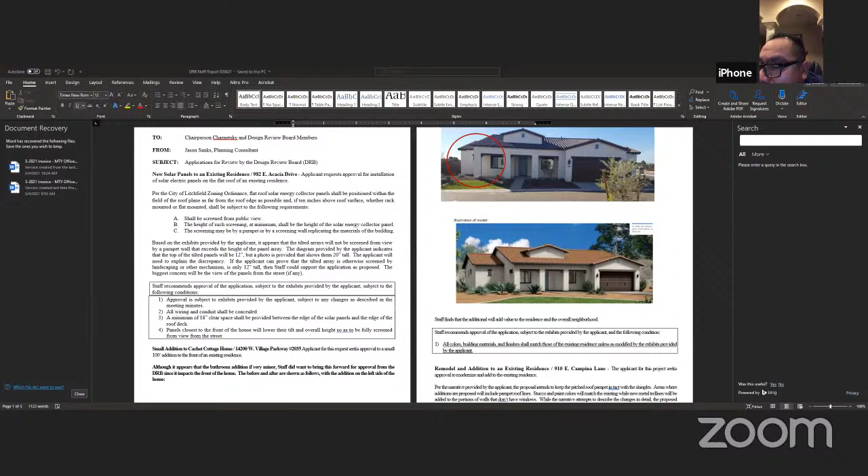Okay, well, do any of the board members have any questions for staff or the applicant? Let me get out of my screen here. Let's see. Okay, there we go.

I drove by that area. It's more when you see the pictures of the elevations - they look like standalone things. These are very tight together, zero lot line sort of houses.

I don't know if there's a Google Earth picture of it. Probably not because it's recently built. The problem is if it's gated, I can't get Google Earth. By the way, the gates are open until they sell out, so during the day anybody can go in. Just so everybody knows, whenever I'm able to provide a Google Street View, I will, but sometimes I can't get it because if the gates are shut when the car runs by, I can't get it.

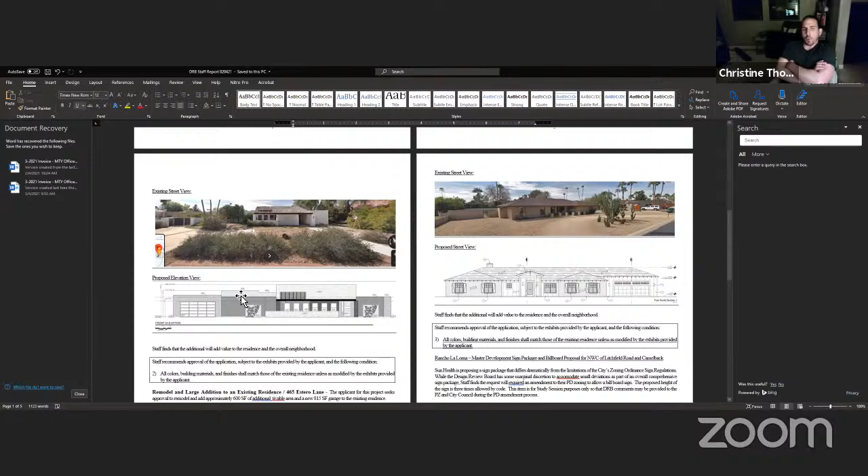All right, are the trees staying or are you taking them out? I believe there is only one tree left there now, we haven't done anything with it. Those 3 palm trees are going to stay though, for sure. And I think there's like one orange tree in front here - I'm sorry, I cut the existing garage off. Okay, all right.

Thanks for clarifying that, I couldn't see it from the street view. Okay, yeah, it's difficult with the landscaping to see that. This will be a good remodel for this street.

Any other questions from the board members? Muted again? No, from the board member to staff or the applicant?

Would anyone like to propose a motion? There's no discussion.

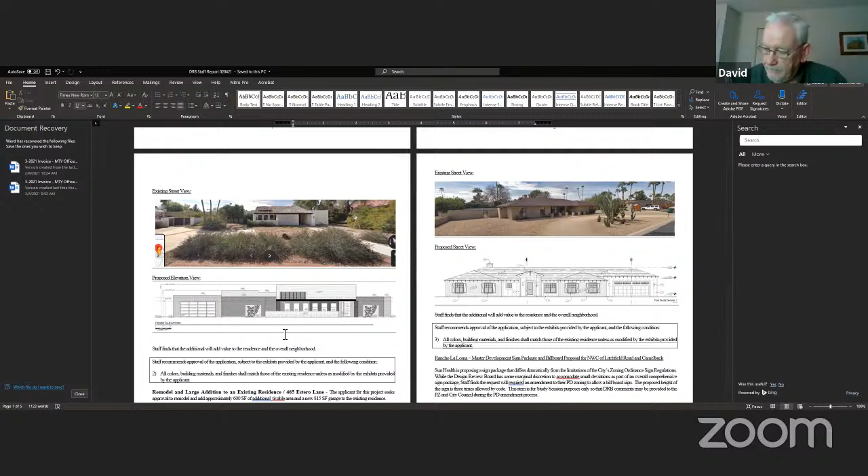I'll propose that we approve the package as submitted for 910 East Campina Lane. Have a second? Sure, Ron. Okay, thank you. We have a motion and a second to approve this as submitted. Any discussion? Hearing none, all in favor say aye. Aye. Aye. Any opposed? Okay, good.

I think this will be really nice for this neighborhood. Thanks. Thank you very much.

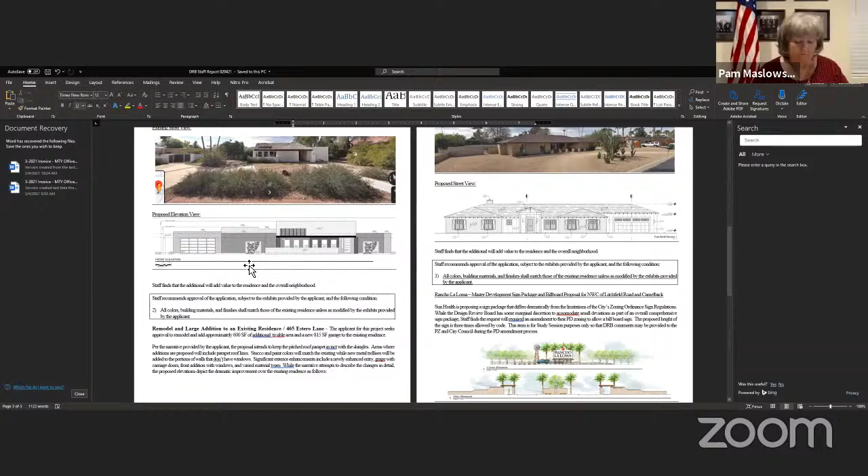Okay, now back to... my mouse is going really slow. Okay, next item. Okay.

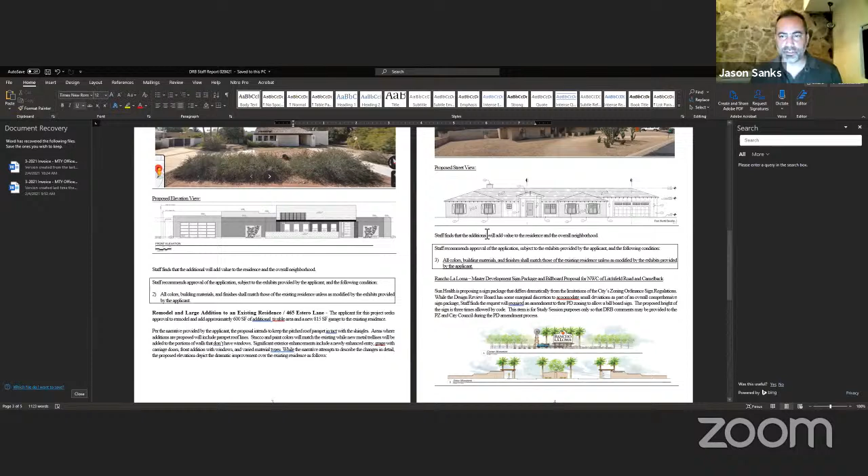Design plans for an addition and exterior remodel for 465 East Estero. Jason, you're up. Kind of keeping in the same vein as the prior application, we have an existing residence at 465 East Estero. The applicant is seeking approval to remodel and add about 600 square feet of additional livable area, and a new 815 square foot garage to the existing residence, about a 4-car garage. Based on the narrative provided, the proposal intends to keep the pitched roof parapet intact with the shingles.

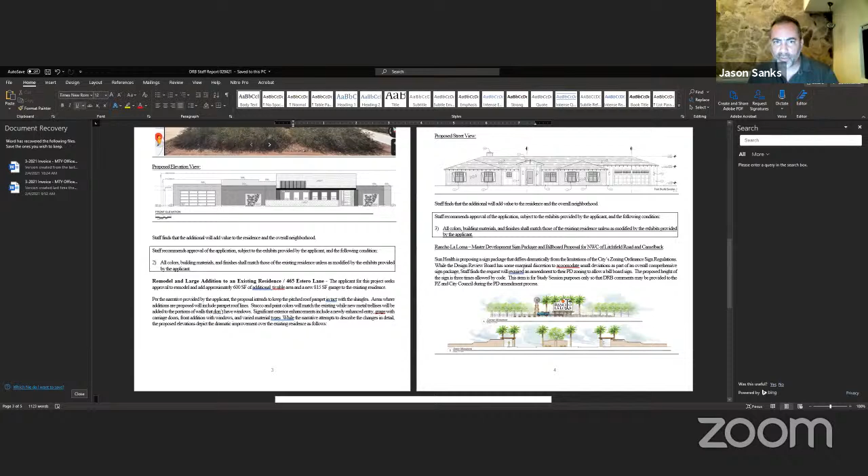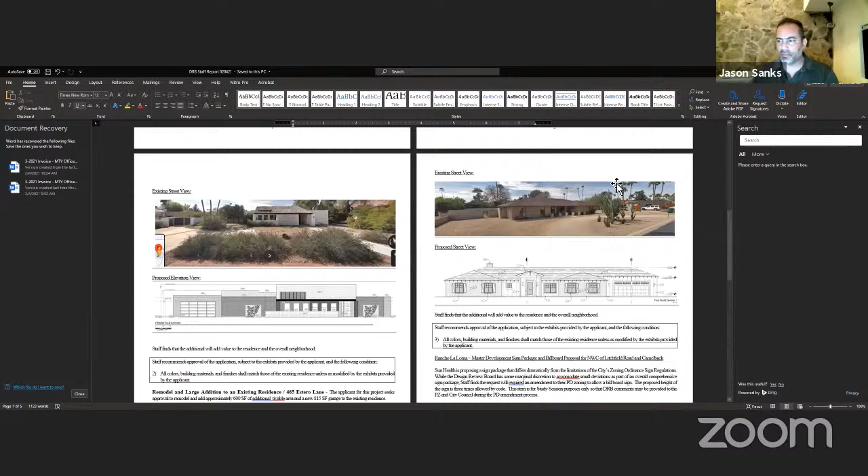Oh, I'm sorry, hold on a second. Let me make sure I'm reading the right one here. And so you can see the difference here from the street view. Obviously these are different residences, so please focus on the page on the right. Maybe if I zoom in I can lose the other one. Give me a second, this might help.

So you can see the existing residence here, kept in good condition—clearly slump block, with pitched roof elements. But the proposal to remodel it is quite different. I guess you could call it making it more contemporary. There's a lot going on with the fenestration—you can see shutters being added, rafter tails. The roof line is more or less the same, but they're adding a lot of adornment to the entry. What we've seen in the past is these low-slung entries, like what's here. They're bringing the prominence of an entry tower to bring focus to the front door.

You're going to see a difference in materials here, and again more adornment to the windows. Just a lot of changes, and then you'll have the carriage doors added over here to the addition on the right hand side for the garage. So there's a lot going on here.

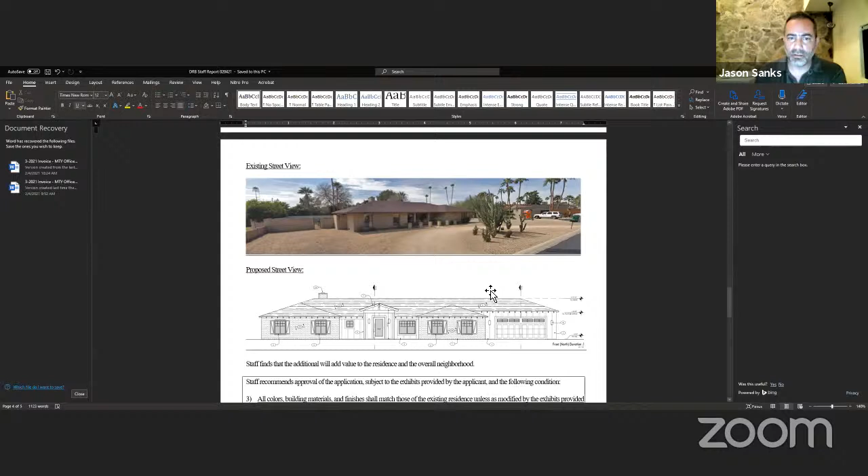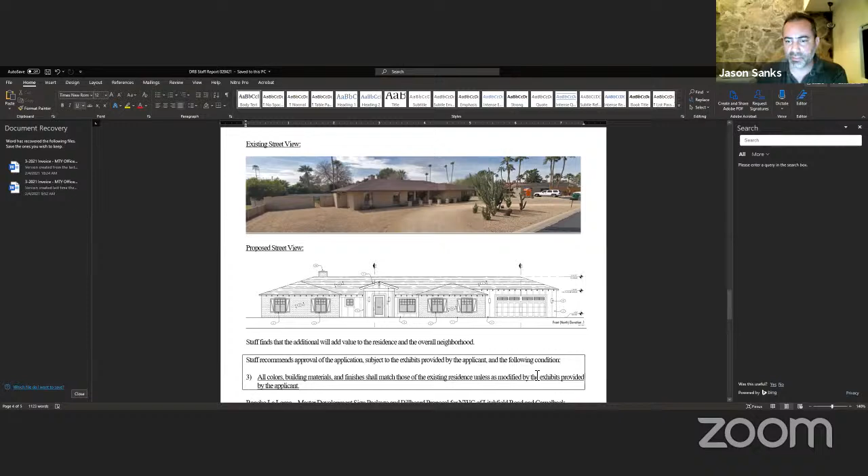It's a large lot. Staff finds that this will be another great addition, updating what's already a nice home into an even nicer home, consistent with some of the relatively upscale remodels we've seen in Litchfield Park as the park continues to improve. So we are recommending approval as the project is likely to add value to the residence and the overall neighborhood. All colors, building materials, and finishes shall match those of the existing residence unless modified by the exhibits provided by the applicant. With that, I'd be happy to answer any questions.

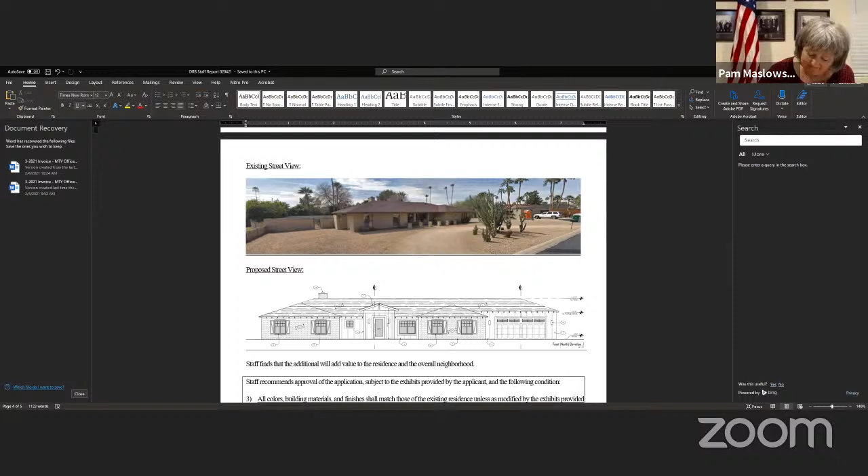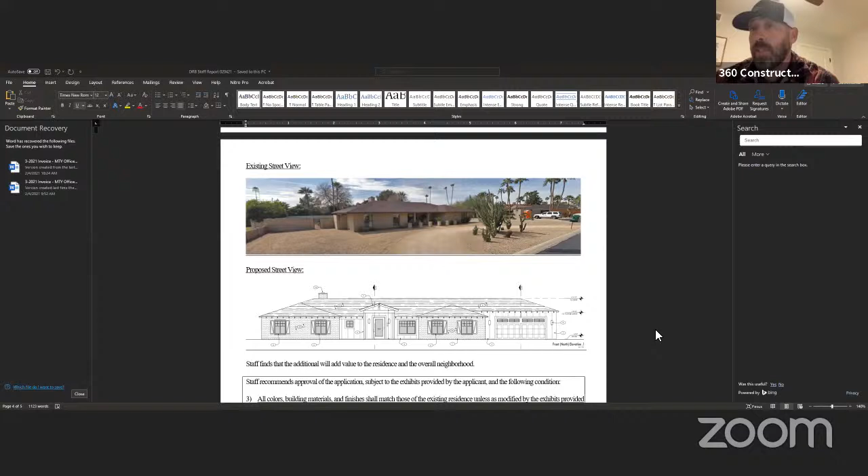Is the applicant present or his agent? Yeah, this is Mike with 360 Construction. Okay, right, he's back. We saw this before, didn't we? Yeah, there's just been some slight modifications to the plan, and it actually simplifies the plan and takes away the one thing I believe the board had a problem with, which was the RV garage—that's been deleted with these new changes.

Okay, it looks good, looks really good. Any questions or concerns from the board members? So I think that if I could say something—my son may be joining me.

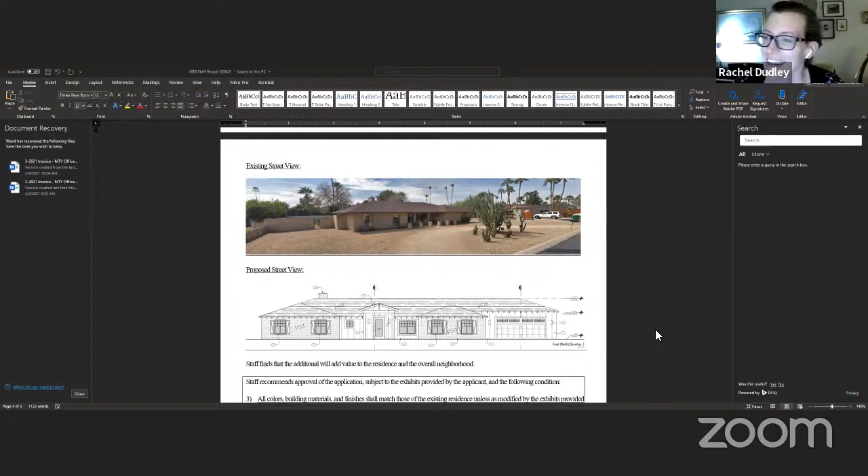I love this, I think it looks beautiful. But I would like to make a comment generally that with that desert landscape style, the color of white seems a little cool in tone to me. You might consider going with something a little more warm of a white. It obviously doesn't change my feelings about this package, just a comment for consideration.

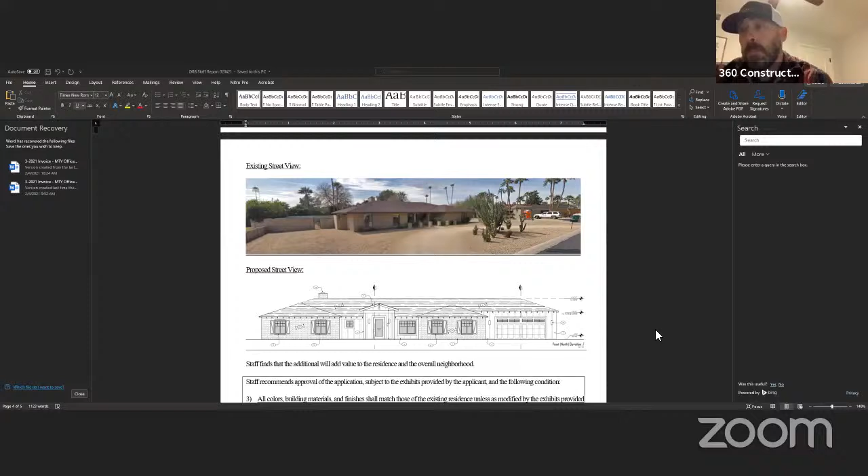With a remodel this size, there will be some landscape upgrades following construction of the house, and I'm sure some more greenery, getting rid of some of the desert landscape and rock. Yeah, I think it's a nice package.

If it's okay, I'd like to make a motion that we approve this as presented for 465 East Estero. Okay, thank you, do you have a second? I'll second. A motion and a second. Any further discussion? Okay, all in favor say aye. Aye. Aye. Any opposed? None. Okay, passes. Thank you, thank you.

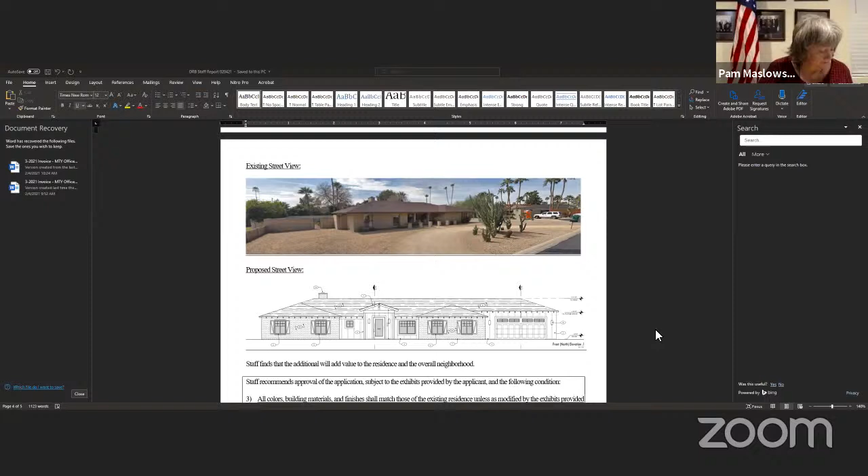All right, and I think we have one more thing. The next item up is signage proposed for Sun Health La Loma campus located at the northwest corner of Litchfield and Camelback Roads.

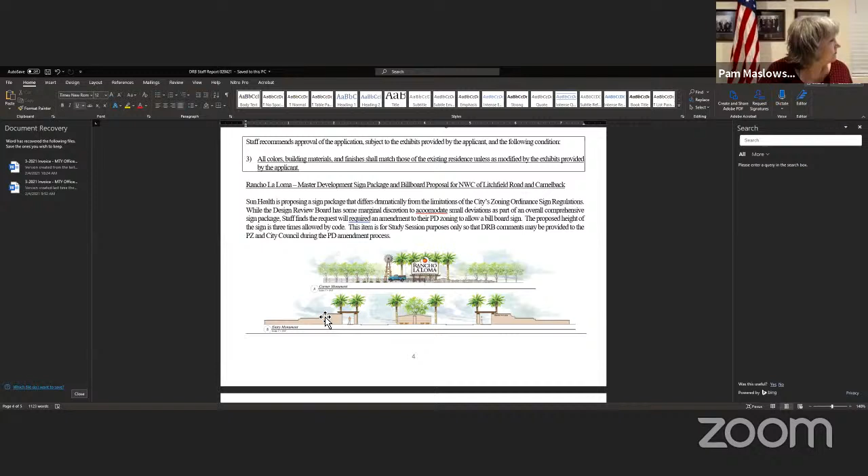Jason, can you tell us about this one? Certainly, thank you board members. We also have Paul Vanderveen available, he's through telephone, here to discuss things. But let's do the backstory first and then talk details afterwards.

As you know, Rancho La Loma, AKA Sun Health Development, is the master plan community that includes the Continuum of Care campus, which is the approved use across the entire property for the most part, except for agritourism.

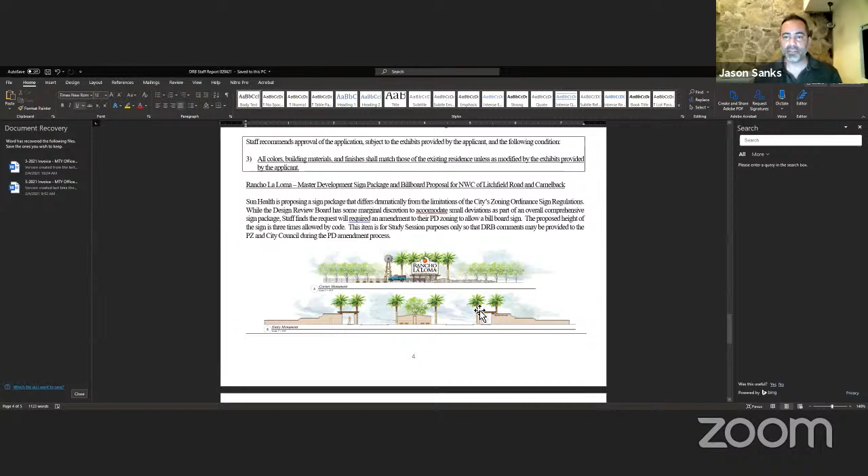I've gone ahead and shown you this, kind of the landscape version. The below portion is the other entry, further west, which is a lot more muted and typical of what you're seeing at Sun Health. This is the blow-up showing the gooseneck downlit looking lights that will illuminate it. On the ground, you can't quite see it, but there's intended to be some uplighting so the sign really glows with an even amount of light.

They'd like to do split rail fencing. This is all kind of somehow managing to tie this agritourism concept that is as yet undeveloped with the whole Sun Health campus, which is a conglomeration of basic contemporary Southwest architecture and a little bit of the new stuff like you saw in the community center. It's all kind of an amalgam together.

So what they're hoping for is to get your blessing and send it up the chain so that council, I believe, will ultimately be the one that has to make the decision on this, and they can construct it. Now, of course, Paul would love to do this within like a couple months. I'll let him speak in a moment.

But if you look down here, here's the site plan. This is the area where, see this stuff down below? This is the kind of area here where it's the more muted stuff. This is the billboard. This is Litchfield Road. This is Camelback. And here's Fry's and Starbucks. And this is 25 feet tall.

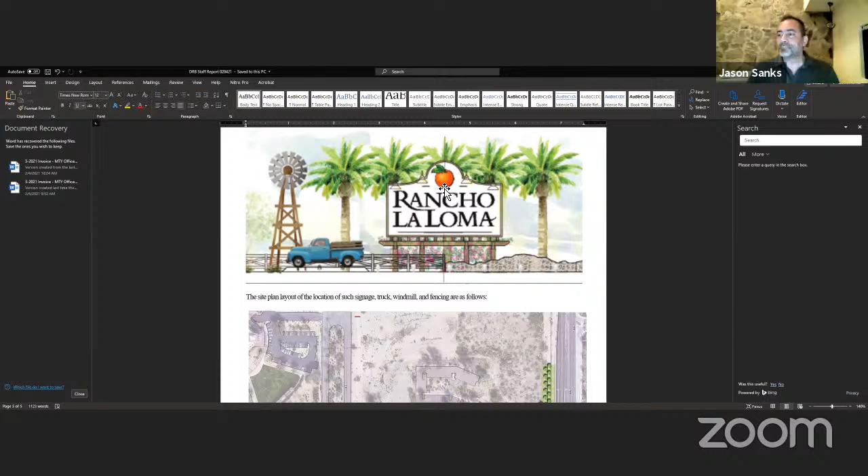Do you have anything to add, Paul? Yes, Chair. This is just for clarification. Paul Vanderveen with Sun Health. Our corporate address is 14719 West Grand Avenue.

I think Jason did a good job. I think he's being a very good city person to state the case. I'll put a little bit of passion in that we do feel this is a statement for 322 acres, which would include the hilltop portion. We're not trying to say this is Sun Health, or that it's one of the pieces of many things that will happen on this property, but we did want to harken back to the history and tie things in.

So the truck that's representative, and I think there's an exhibit in the package - I'm sorry, I'm on my cell phone tonight, so I apologize for my format - but the truck actually was part of the Hilltop at one time. It is an old farm truck, a 1957 Chevy. It sits on our property, abandoned, and looks a little beat up right now. The city manager and I were going back and forth on who actually owned it, because we didn't know for sure if it transferred when the city took it over, but we found out it's ours.

And so we actually think that's a historic element. It'll be painted the Sun Health blue, and on the door it'll say Sun Health. So really the idea is that we're promoting Rancho La Loma, the historic property. The development would be like any development you'd see maybe Pulte do, where it's something, and then 'by Pulte' - the door on the truck would be 'by Pulte.' The truck would be affixed to the ground and done.

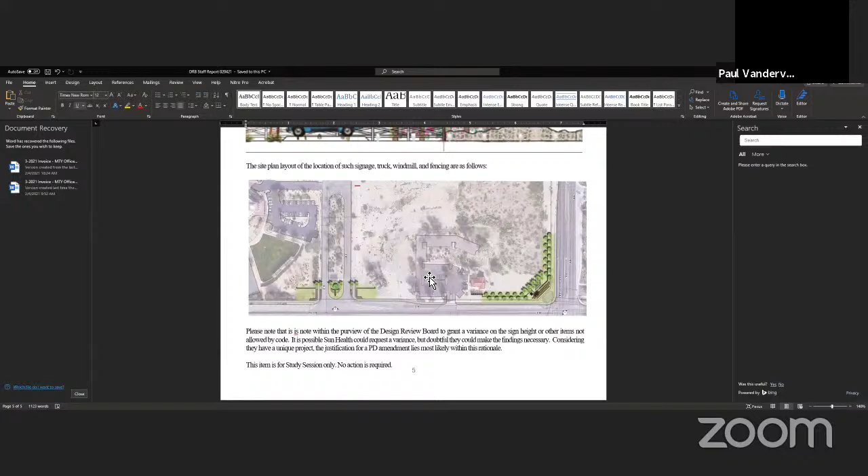So I'm sure it's shocking, but I can tell you this is several renditions down, and the first rendition we were told looked hillbilly. So if that helps, we've matured from hillbilly to something that at least our group and the people we've tested with feel much more comfortable about than where we were.

And that's a very good negotiating tactic, Paul. Well, I'm just saying this wasn't our first draft. We went through probably 6 to get to this point, but that doesn't mean there aren't going to be comments. And like Jason said tonight, I don't need a nod of approval, just how you feel. If you need more time to think about it, you can respond after the meeting too. But I definitely want to hear or at least understand your concerns, and maybe if there's something positive I'd like to hear that too. I don't need to take all night, so however you guys feel about commenting on it, I'll take that and we'll see where we can go with it. And I thank Jason and Pamela for working with us and being patient.

Thanks. I'm glad I didn't see the earlier versions, because I still think it's a little hillbilly.

One thing, if I may add while the conversation ensues, is a concern I didn't note earlier: if the agritourism component of this project never materializes, and we just end up with 1,100 residential units and some medical buildings and whatever else happens in the back, how would you feel if this were constructed standalone, with dirt behind it, eventually reaching the hilltop? My thought was, if it was all built out and you had this great agritourism thing going on, would that make any difference in your decision? That was just one thing to throw out there. At that point I'll mute myself and stay on the discussion.

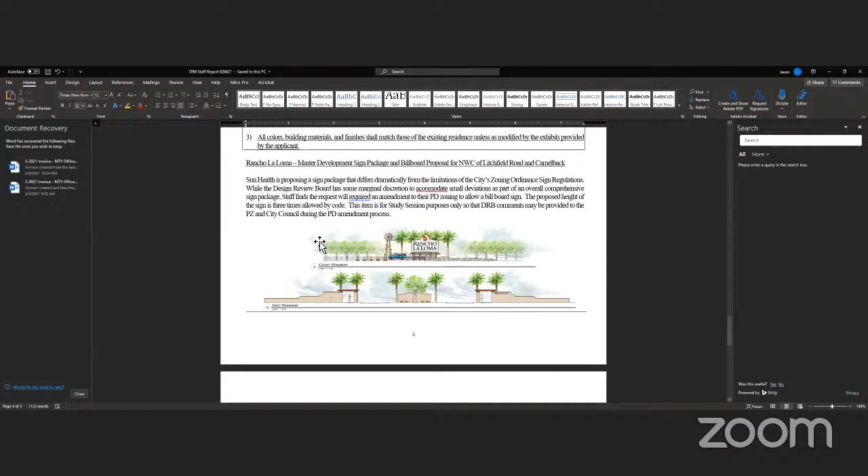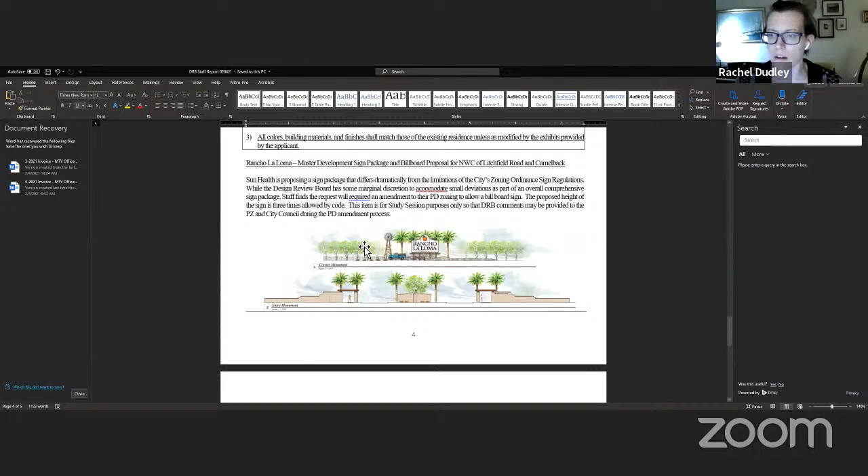So yeah, that's good input, and we can look at those things. I'm so glad you said scale, because that was my next question—this picture has the truck and the windmill. Do you think that's the correct scale based on what we're describing? Like, is the windmill a little bit higher than 25 feet, and is that truck visually about what the scale would be?

The truck is actually just a smaller truck, but scale-wise it's probably in that realm. My architect firm is within that range. The truck they used is probably a little smaller than the truck we have that we're going to remodel, but Greey Pickett, the architect's firm, has told me that this is roughly the scale you would see.

Jason caught me on this as well, saying if you could get the actual corner in a photo and then Photoshop the scale on top of it—I could probably do that with some ballooning—then some of the scale concerns might be more acceptable. If the content were okay, then we might be able to bridge the two concerns.

The other comment, which Rachel already brought up, is that it does seem to be a different animal from the other buildings that have been brought forth. And if the agritourism is going to be on this kind of thing, maybe that's something to look at later—it's got to kind of tie together. Right now it's just a really foreign thing to the rest of the development. You're not expecting people to pick a theme twenty years ago and stick with it, but I think it's a little discordant.

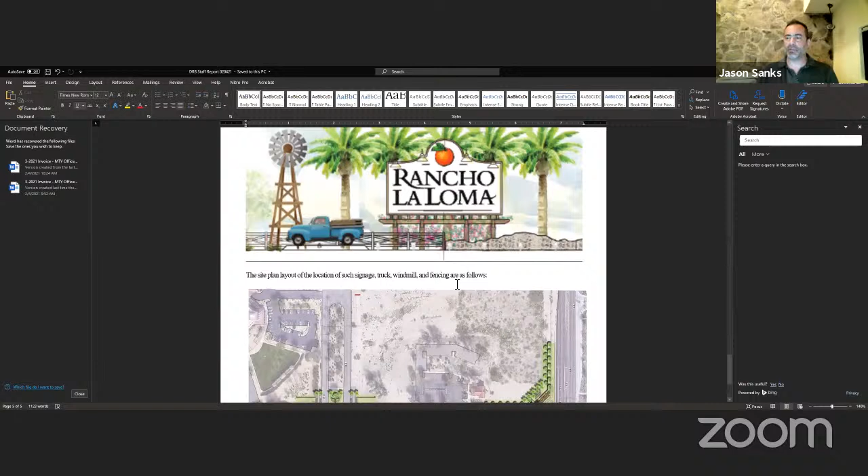I agree with you, Paul, and to clarify to the board what we've requested—there are a number of programs. He's working with Greey Pickett. They have many sophisticated programs at their disposal, as you know. They can do a very realistic photo rendering of what this thing will look like.

If I'm sitting in my car right here, or right here, or right here, or right here, you can know what this thing is going to look like. Now, I understand the one part I differ a little bit with Paul on is this idea that it's really set back far from the intersection. It's really not—fifty feet right here is sitting on top of the intersection, really. Because when you're thinking line of sight, this is going to be like right here.

Instead of us trying to find ways to coax in and diminish and try to swab it in, let's just say it's going to be a 25-foot billboard that's going to be illuminated and it's going to be at the intersection—do you like it or do you not like it? And if we do the rendering that really shows what it looks like, I think, Paul, like you said, you're working on it—I know you don't have enough time to do it, but we just met.

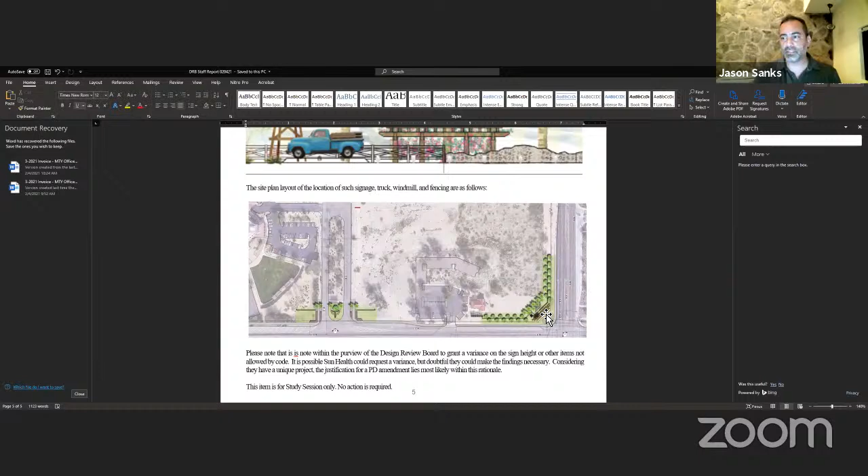I think the next time the design review board sees it, let's look at that. I'm thinking the height of the billboard will start to look a little bit lower than it's seeming in this 2D view, right here. It's like, whoa. But I also wouldn't be surprised if it still looks really tall.

No, I appreciate all the comments. I appreciate that we're allowed to have a conversation like this, and I'm not insulted by anything. I appreciate it, and we can come back with a little more detail. Just start to absorb it, and we'll see what we can do based on the comments. I just appreciate you guys letting us talk tonight about it.

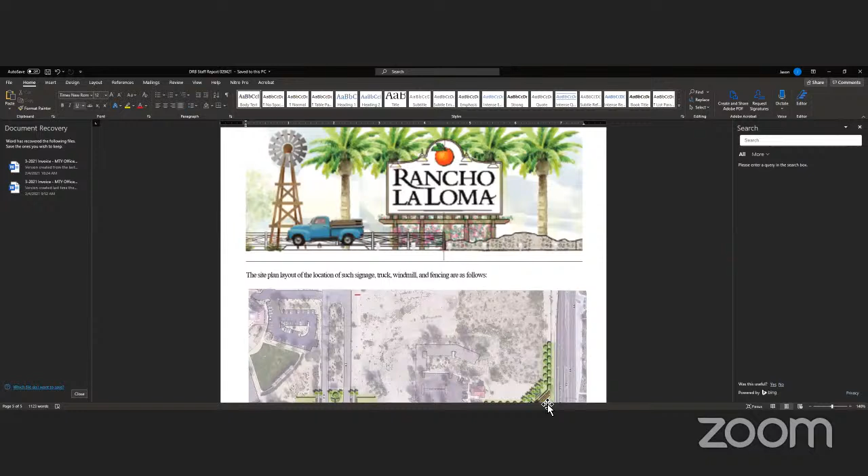Well, this is Dave Ledyard. One of the things I would like to see, I'm kind of a visual person, so some different angles that show what you're anticipating is going to be likely directly behind that sign, and how it looks from different angles as to the office building to the west and the more modern.

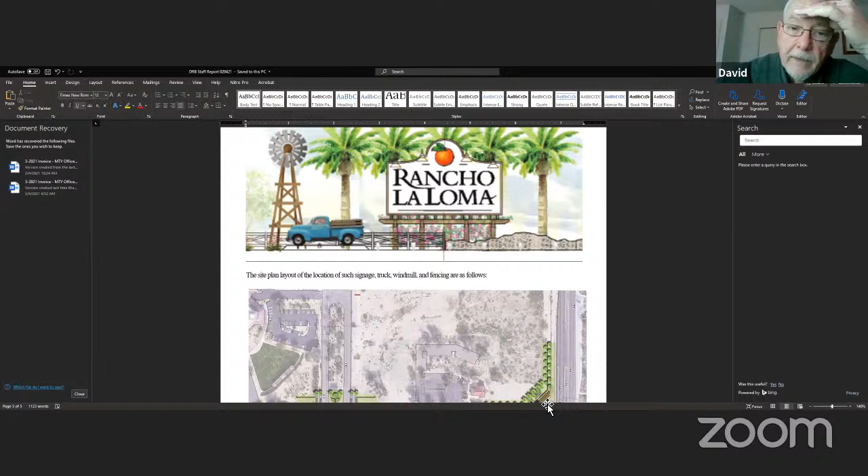And the other one that I think is really important is where you're setting that sign. I think it's too tall, and I'm not thrilled about the height of the windmill either, but one of the things that concerns me is what that's going to look like from the backyards of the houses on the corner directly across the intersection. Because those properties already had to deal with the CVS property, before my time, and people are still talking about CVS and those lights.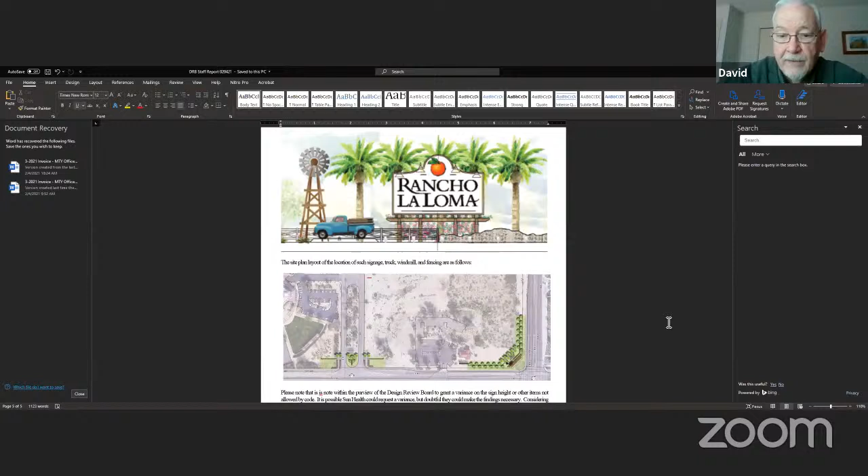So it's not going to go away. And then we have the Fry's Center, which they seem to have resigned themselves to. But we're talking about a lighted billboard now that's right across from somebody's backyard, and there are at least two houses over there that will be able to see that from their backyard. So I'd really like to know what those people are going to see. And once we get further in, I have no doubt we'll be hearing from that neighborhood about this sign. So I'd really like to take a long look at what's going to be there.

And if I may add to that, Board Member Ledger, using this process, I don't see a legal means outside of it that would hold water. As part of a PD amendment process, there would be a notification process to allow those neighbors to be involved, rather than a DRB process where it shows up on an agenda and gets posted on a website, but we're not sending out notices where people are like, oh, there's something happening that's going to impact my life. For example, we didn't send out notices for the custom homes that were on the agenda tonight. So that's just the way we do things.

Again, not thumbs upping or thumbs downing anything, just making sure we follow the right procedure.

Yeah, and I think scale and lighting can possibly be adjusted, but we'll take all the comments and come back and try to answer all those for you.

And real quick, Paul, I think lighting is going to be important, because I know there have been some complaints from people in the greens about the lighting from the baseball field. So lighting is a real sensitive issue for them right now.

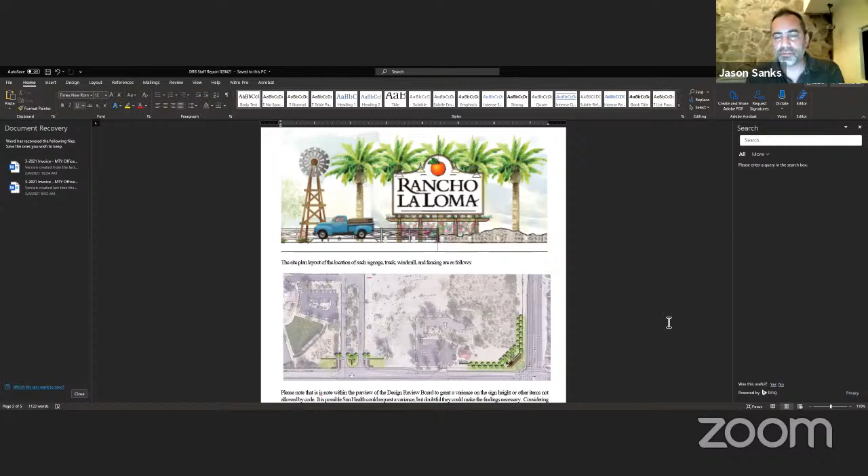Yeah, and Paul, I didn't say it was an internally illuminated sign. I said it was illuminated by the gooseneck lights and the ground lighting. Sorry. It's okay. You didn't mention my shovel backlighting though, did you? I didn't really get into the shovel, because then we'd have to start talking about what that looked like, and it's not on the picture. So, okay, all right, we'll get that up in the next meeting. He's got some funky shovels in the ground. He wants to show you next time.

Okay, Jason, anything else you want? Any other comments from the board? No, I guess the comment I had too would be, unless they've got signed contracts and dirt's actually moving, there's this very much agritourism-themed sign concept occurring.

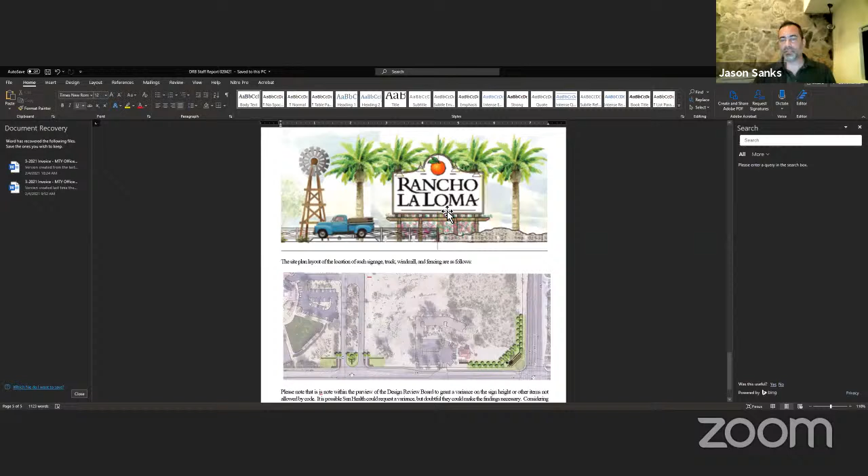Is there any connection as to when this land use occurs behind it, and you open up a PD box? Are we going to get the groves, the rest of it that ties into the overall multi-use master plan theme? That's the only thing I worry about—in 20 years, are we going to end up with a bunch of new houses, some medical buildings, a community center, and then 20 acres sitting here with this big billboard out front?

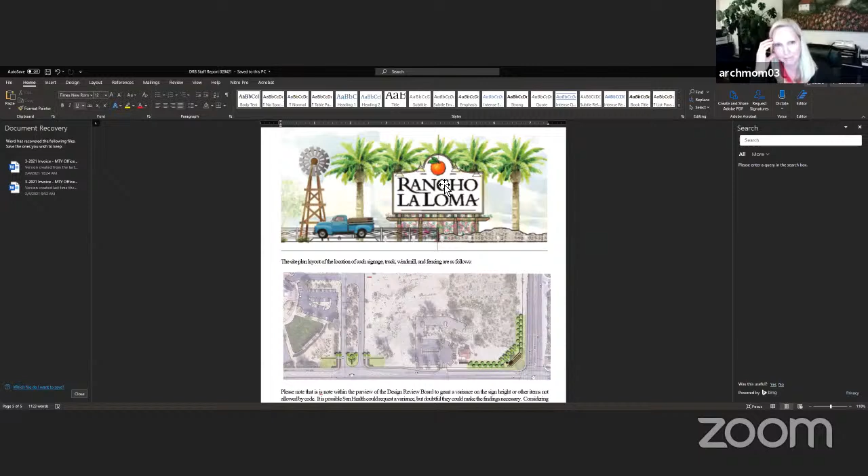Yeah, my first instinct was like, oh, nobody's gonna like that. My first impression is it's just not Litchfield Park. We have an agricultural history, but there's more to us than that. I just know a lot of people are not going to be in favor of something like that.

I agree, Susan. I kind of think the windmill is—you guys may need to educate me, because I wasn't born and raised here—but were windmills really ever utilized here? That seems more like a Midwest, Oklahoma kind of thing. I honestly just think of the Dust Bowl, and I don't think we want to evoke thoughts of dust here.

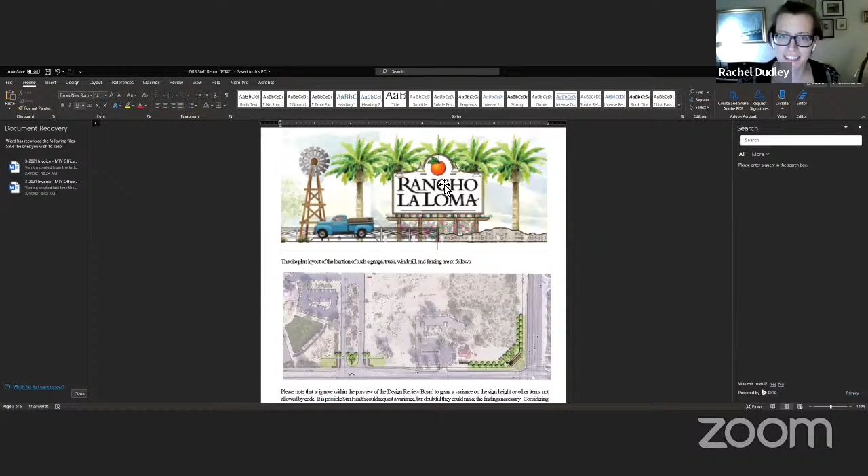So anyway, I just wanted to mirror those thoughts. I think if you took the windmill out, it automatically makes it 25% better. Then we can go from there. So anyway, those are my thoughts. Anybody else want to add anything before we move on?

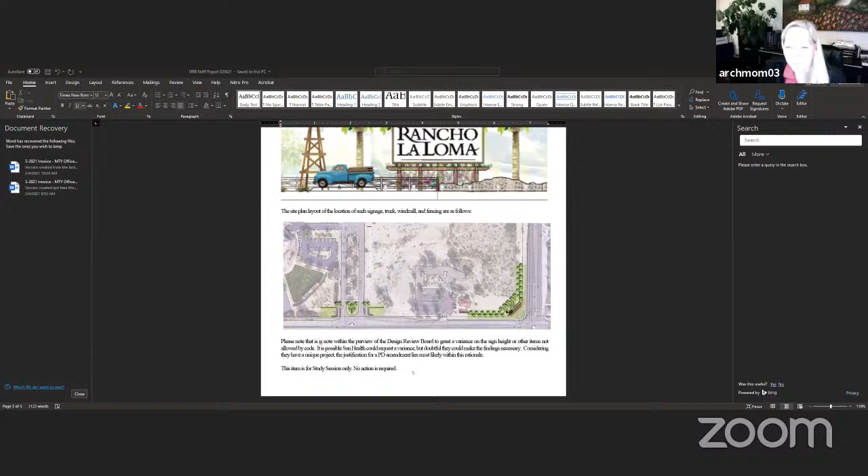Okay, I don't have my current events from staff. Just a couple things—I believe we're continuing to get a forward action on a prospective Human Bean application application, that's at Dysart and Camelback. There's a parcel there along Camelback.

The owner/developer, we're not exactly sure which, is seeking to split that parcel for a possible Human Bean—it's a coffee kiosk, not indoor dining, less than 1,000 square feet, very drive-through oriented but would have a patio. We're anticipating that coming in, and the residual of that parcel could be used for oil change, auto service type stuff. But that's the latest on that.

Aside from what you're seeing tonight, do we have something else pending, Pam, besides our work on the zoning code? No, I think that's it. Which parcel is that again? Is it east of the AutoZone? No, west of AutoZone, between AutoZone and Dignity Health. Sorry, you're right, I'm thinking east of Dignity. Yes. Sorry.